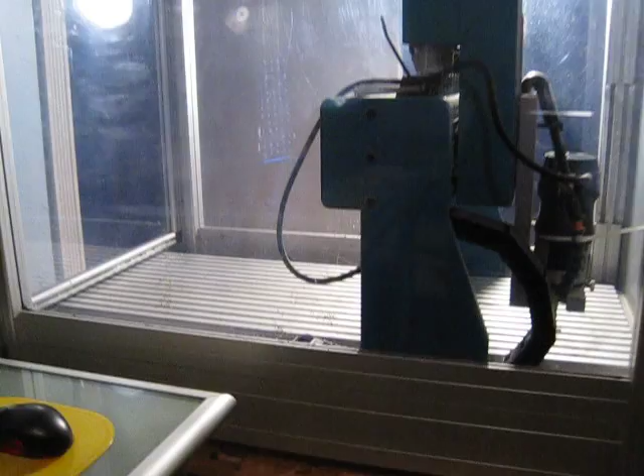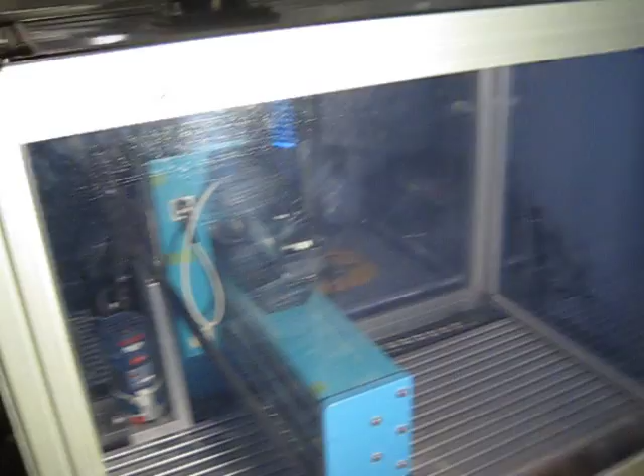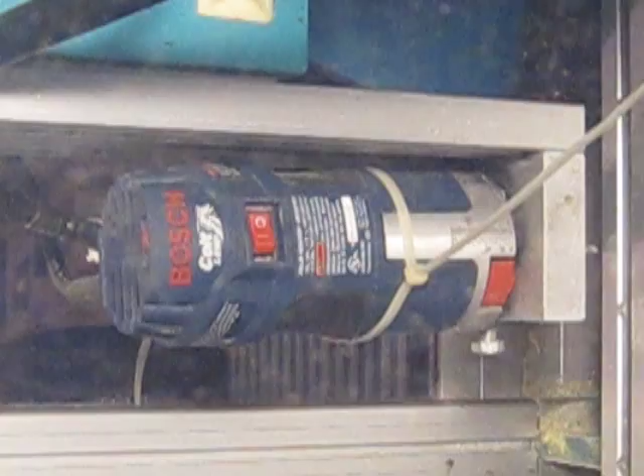This is the machine. It is inside a very nice enclosure that lifts up. Whenever you want to load anything in there, you can load it in by lifting the handle. There is a Bosch Colt router, and there's a bit in there right now.

You can loosen the collet and put in all different kinds of router bits. There's a handle down here, and you can actually just lift that all the way up, and sometimes that'll stay up on its own.

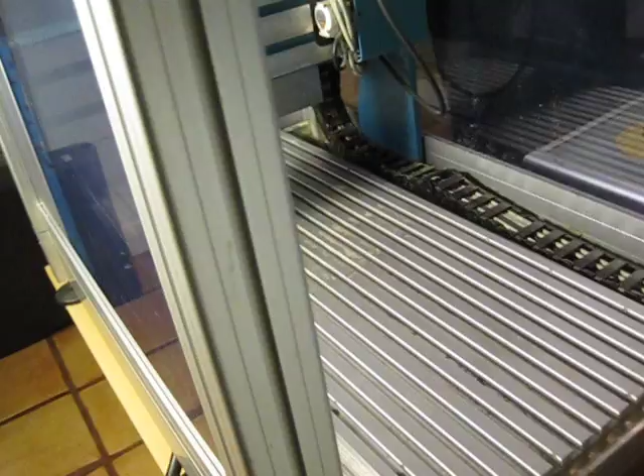Tonight it's a little cold out, but anyway, I'll shut this now and we will go ahead and demo the machine. It's a pretty large Flashcut. I'll have to measure it, but I think it's about 36 by maybe 16.

It's got 3 different places to locate the Z if you want to have a bigger chunk of material below the router. You can see there's a 3-dimensional feature I cut once and a little 2D pattern, and this is something that came out of a program I'm going to show you.

It comes with a vacuum table and some pads.

Flashcut CNC user guide. It's got all the controls if you just want to do some simple G-code. Servo manual - this is actually a servo CNC with ball screws, so it's got very nice tolerances. RhinoCam also comes with it, which is what you can use to basically make whatever you want in a very simple form. It's kind of the same as the Mach 3 software. I think they're at Mach 4.

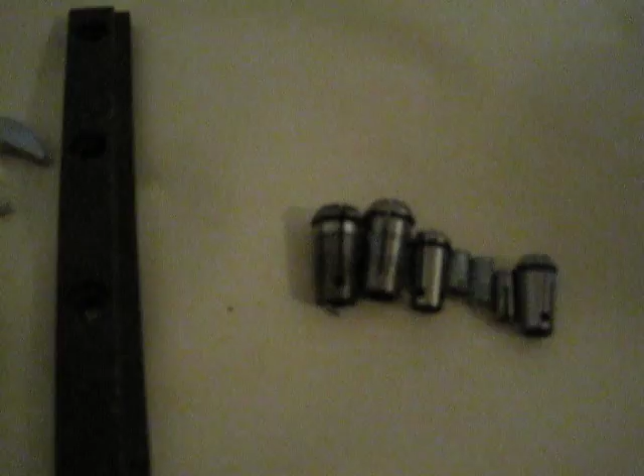It comes with some wax to learn with, some plastic - actually, that goes to my lathe. But lots of end mills, all different sizes, and some collets, different sizes, some hold downs, wrenches, a caliper, some micro end mills, and there's the pump itself if you want to run some coolant.

I've mostly used this machine for wood and plastic. It will do aluminum and brass, I guess non-ferrous metals.

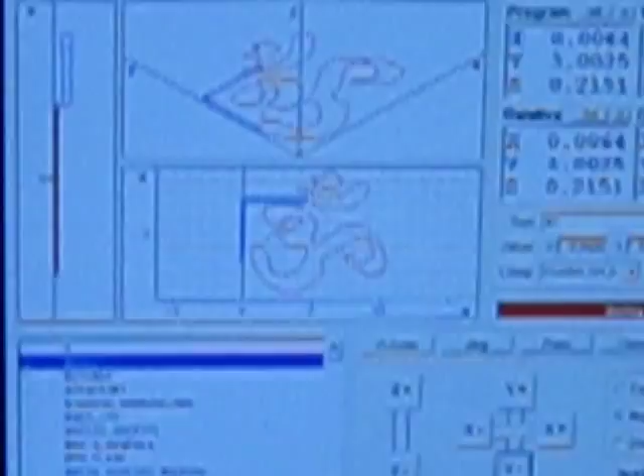So this is Flashcut, and you're seeing on the screen - now you can see that there's the Om symbol. I had a neon class, and basically I cut that out of a piece of wood, and I put neon around the outside and made it illuminate with a screening over the front. It came out rather nice.

So this is Rhinoceros. It's got Rhino 3, and if you want to use RhinoCam, you just type in RhinoCam. It comes up because I use it all the time.

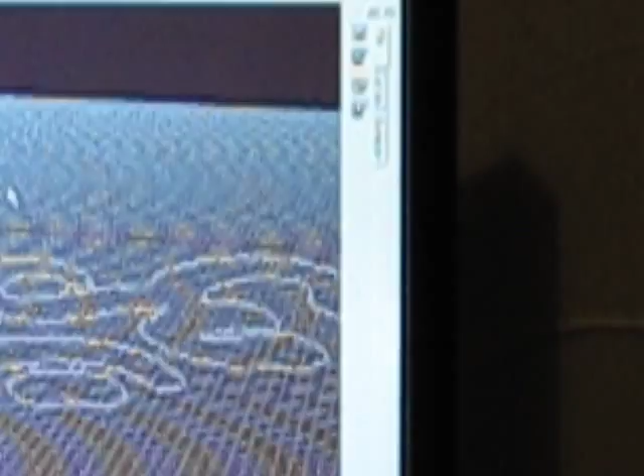Close that down. You can go ahead and pull in a file. Let's see what I've got - I've got the Om in here actually. What I did is I just imported this in from AutoCAD, and I just used AutoCAD to scale it. That's basically where my 0 is going to be, and it's going to run this way - positive X, positive Y, and Z down if we add Z down.

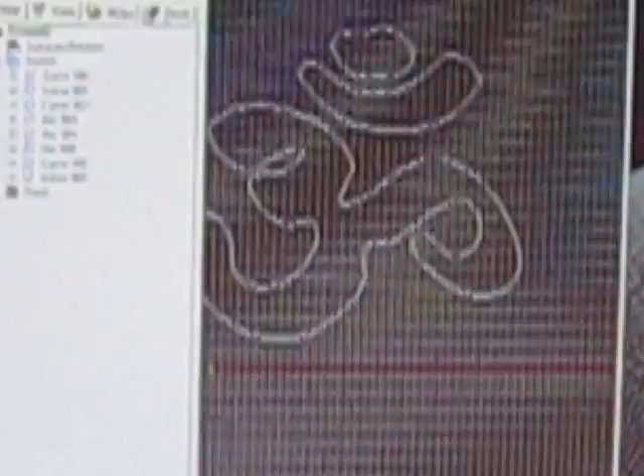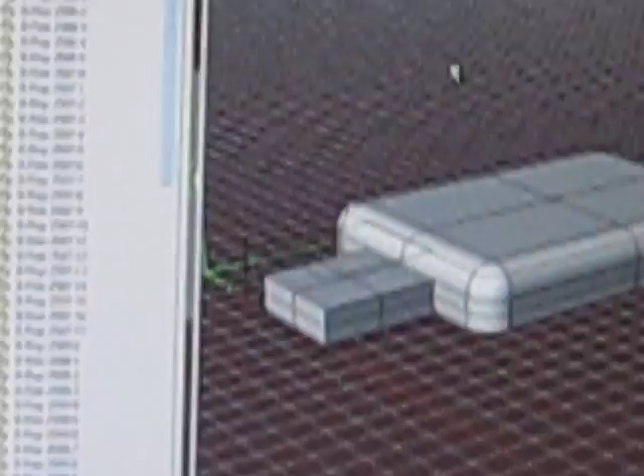I'm not sure what I've had in here, but yeah, there's actually a product that I made on this mill. It's 3-dimensional, and I just let it do a toolpath right around it. It's called Untitled, so it might be hard to find it in here, but these are the ones I've been using. Let's just take a look and see what comes up.

Also in here, JA3, I don't know what these are. Okay, yeah, let's go ahead and just get on with the demo here.

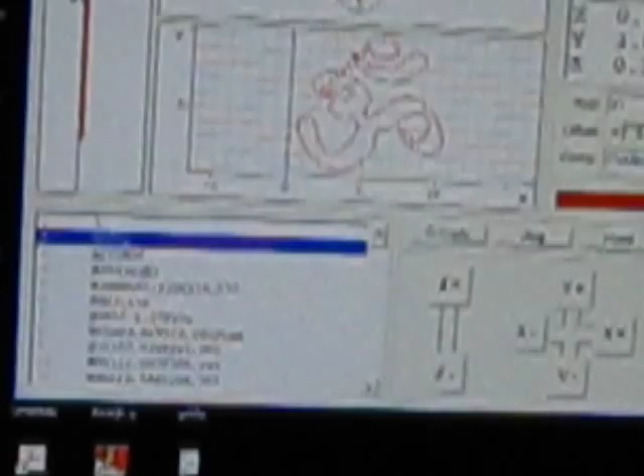I'm gonna stop this, I'm gonna go back to the ohm, and there it is. You can see this one actually is 3-dimensional. There's the G code, and it's gonna start high, and then it's going to just keep cutting down. This is the one I used to actually cut this thing out. I'll go ahead and start it.

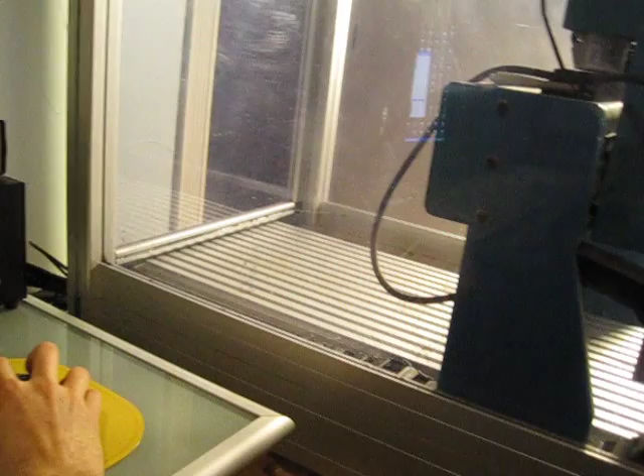So basically, you can jog the machine by just clicking this. You're going to see it move over here. Let me zoom out a little. And when I push this button, this will move. I can Z up and Z down and X. I actually hit a limit switch because I was already over to the side, so I got to go X the other way.

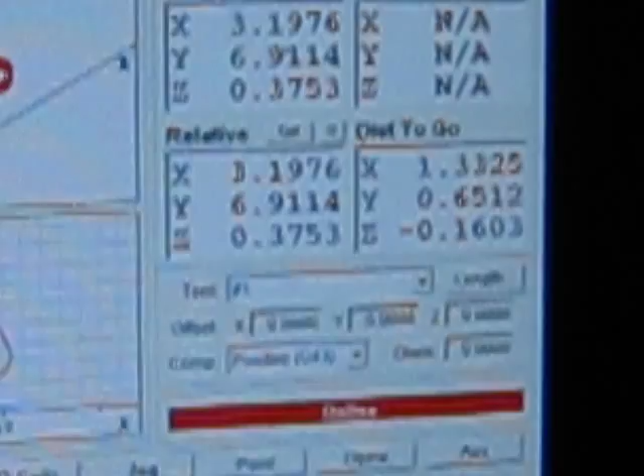You can see that. Now what I'm going to do, I'm just going to kind of give a run through on how you actually use this, and we'll include some training. I'm going to go ahead and zero just by moving those until the X comes down to 0, because I've already seeked home, which I can show you later. I'm taking there 100 thousandths.

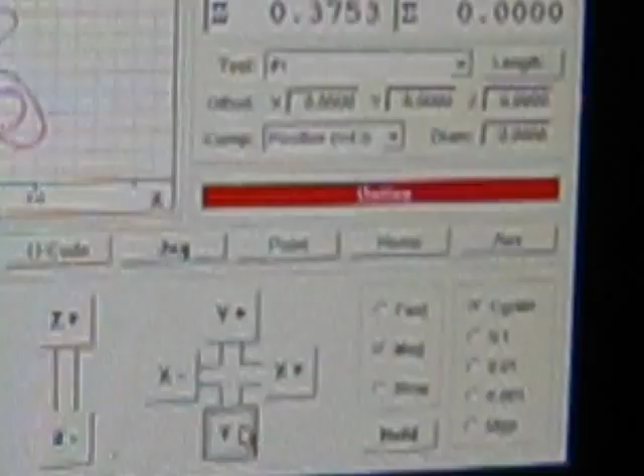Well, now we'll move the Y. We're going to go actually in continuous right there and bring the Y all the way back. I can see it over here. I'm running almost up to the edge, so I'm going to stop right there, and basically it's saying that it's 1.2. I'll put it on 0.1 and bring it a little closer to the edge. Doesn't really need it though, and you can kind of see where it thinks the tool is over here.

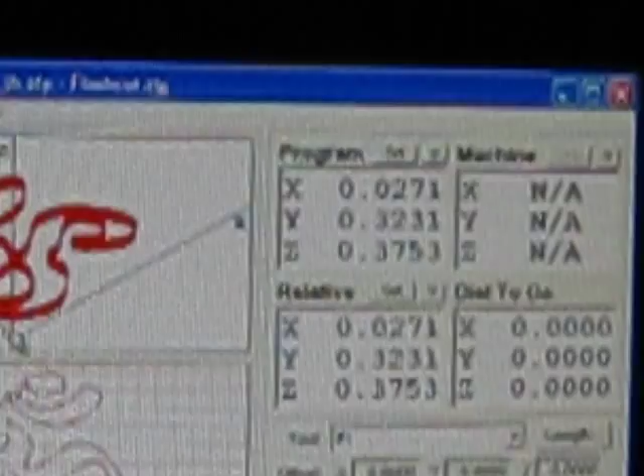So it thinks it's right here right now, right where my cursor is, right by the origin. I could zero these if I wanted to, and then that's where the machine would start and run that way. If I know how long this is and how much workspace I have, then there's no problem making this.

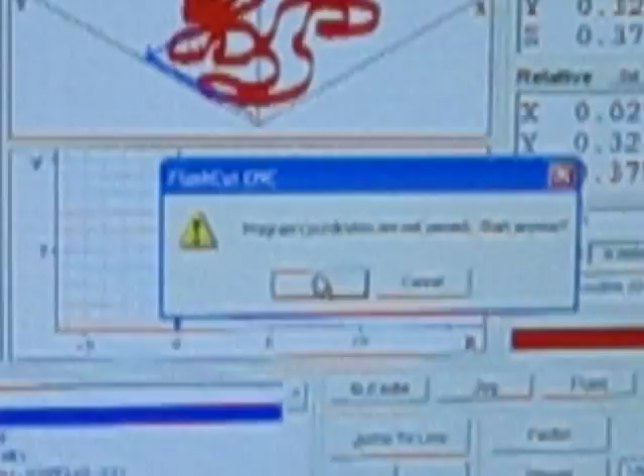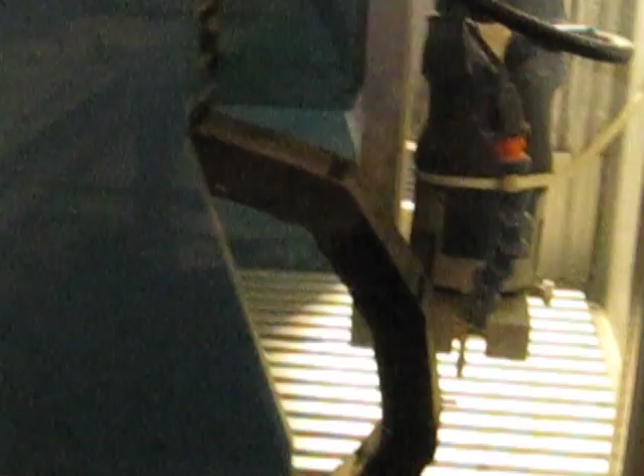So we're going to go ahead and start. All I'm going to do is hit G code, and it's in the right location, and I'm going to go ahead and hit start. Oops, it says coordinates aren't zeroed. If you want to start anyway, I'll say okay. It starts running from the machine position, or moves it back to its last position on the toolpath, and starts the G-code file. I'm going to go ahead and move it back. So it's moving, and it says they're not zeroed. I'm going to go ahead and start. I'll hit start over here, and you can hit feed hold anytime you want.

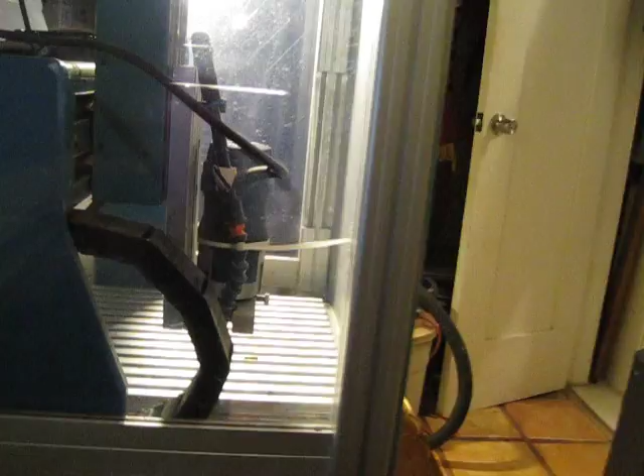Okay, so it's coming down, and now it's actually cutting it out. You can see right here that it's cutting that part of the ohm, and it's doing it over here.

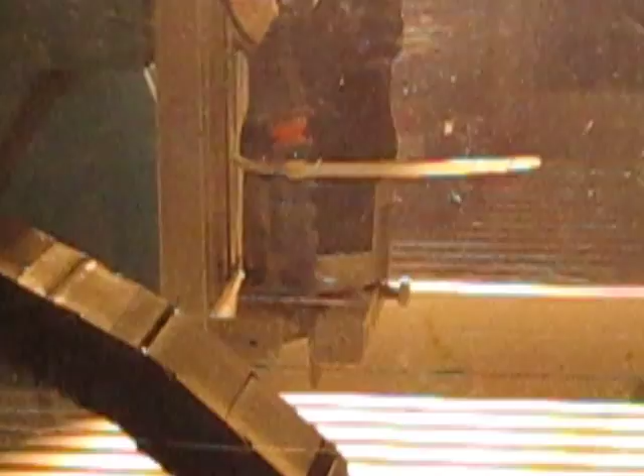Now if I actually had a board in there, I'd have this router on. So I'm going to turn it on, and what I'm going to do is lift up the top, and there's a switch right here. I'll turn it off so we can talk, but it has a speed control on it. It's just a manual speed control, so based on whatever you're cutting, you get to go ahead and pick it.

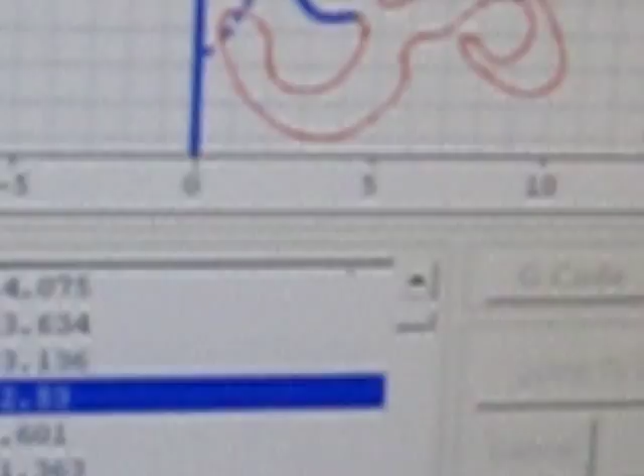But you can see on the screen there's quite a few things going on. You can see the Z on the left, and then you can see kind of where it's at over there on the right. And you can see the tool path also. If I really zoomed in, you'd be able to see, it's hard to tell, but I believe it was about 5 cuts at 40 thousandths deep in wood, whatever it took to cut that out basically. And I used a 1/4 inch end mill.

It's a very simple, powerful tool to use. You can go to flashcut.com and take a look at it. It's a wonderful servo-controlled CNC machine. Let me see if there's anything else here. Yeah, it's not really going to tell, but there's the Flashcut CNC, that's the controller software. And I have the specs, which I'll post on eBay. Basically you're going to get computer, signal generator, servo controller box, the machine as it's running.

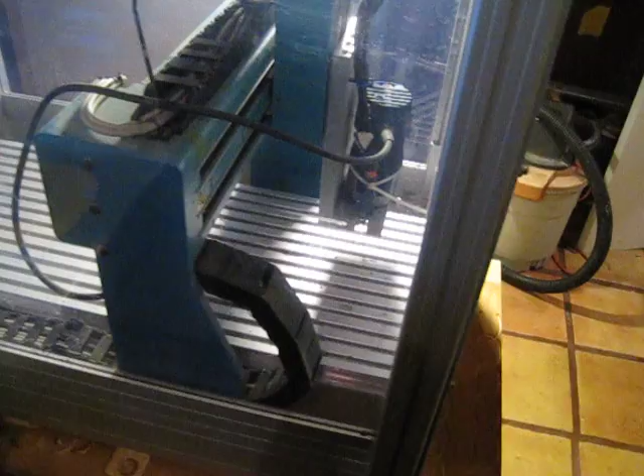I'm going to go ahead and stop it. All you have to do to stop it is you can just hit feed hold, and here everything stopped. And then to turn it off, you just go ahead, and that fan goes off. Done. You can just shut this down over here. I think that ends that.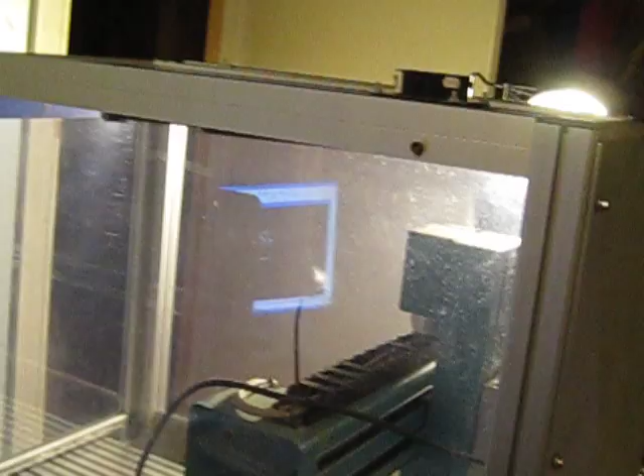Anyway, I work as a mechanical engineer, and I bought this to do prototyping and really just learn CNC, and I learned it very easily with this machine. And now we have a Haas mini mill, so I really don't have a purpose to keep it.

There's a dongle right there. That's what you use to run the RhinoCam. I do have the RhinoCam CD and the book. Very simple to use. I will include an hour of training to get you up and running. All you have to know is where the machine is relative to your computer. So it's pretty simple to learn.

You can make your own jewelry boxes or molds, whatever you need. You can also add a 4th axis onto this if you're interested in that. I've already talked to Flashcut about it.